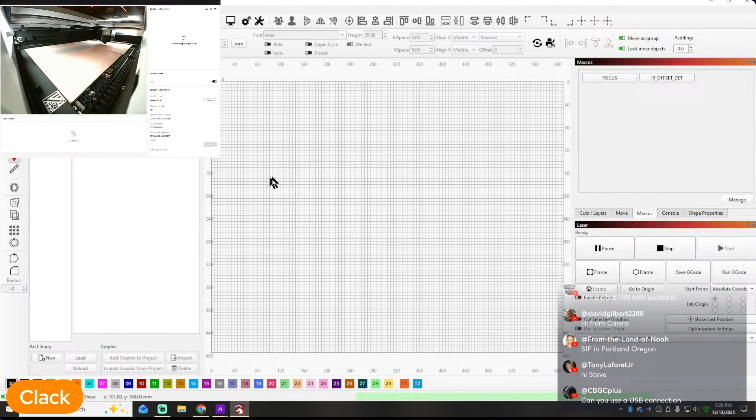So now I've got to switch back over to the machine, and you'll notice when you connect it in LightBurn - yeah, there it goes - you'll see this little green bar pop up down here and it'll say ready. To be honest, there's not a whole lot of other stuff other than this little bit of traffic between the machine and everything.

You can go in here and move it because the machine doesn't make a noise. It doesn't beep, it doesn't do anything when you connect it to LightBurn. So you more or less just have to know that when you see this green bar down here pop up, it's connected.

Now, you might ask, how do you go about setting the focus? Because this machine does have autofocus. The way it works in their software, it automatically does a probe before each job, but LightBurn doesn't seem to do that.

But what you can do is use the navigation button here to move the machine to wherever the material is. I'll move it close to the camera so you guys can see what happens - you can move it really close to the camera there. On that material, all I've got to do is hit this little macro button right here.

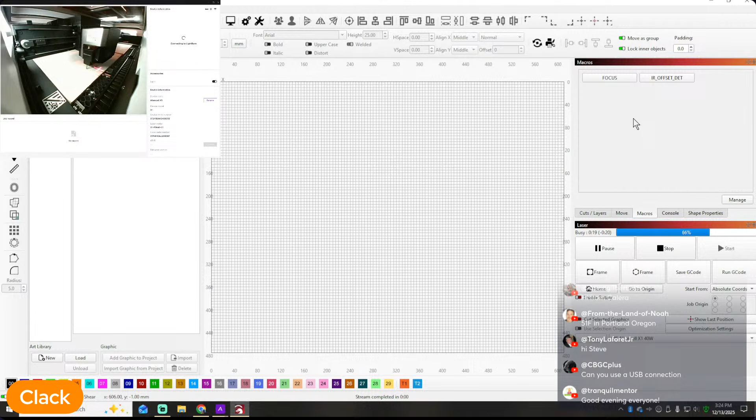It says focus. It's going to run to the back and set that probe foot. It's going to go back there and set it. Once it gets it set, it's going to come back out into the work area where I told it to set the focus - wherever I was at when I said set the focus, it's going to come back to there. It's going to probe down, it's going to touch off. Once it touches off, that gives it its measurements and everything, and it's going to go back and reset the little probe foot. Once it does that, it comes back to where you left it. The focus is set and it's ready to go.

The only thing I have noticed is this progress bar. They've said they're still working with LightBurn to polish everything up, but this doesn't seem to affect anything other than just annoy my OCD.

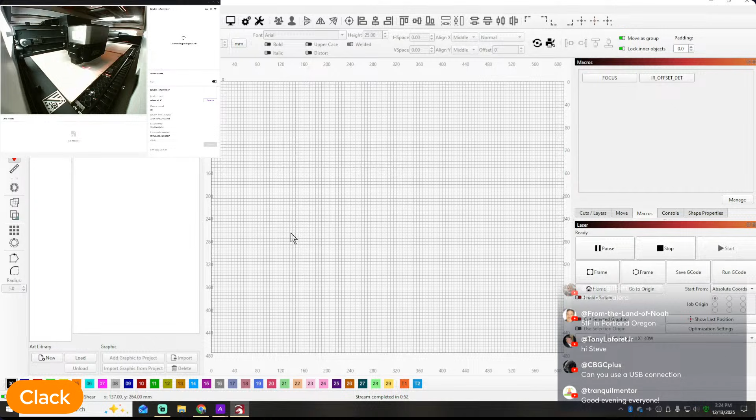Because I can still move the machine - well, I thought I could. But if you hit stop there, you can go back to doing what you want to do. I'm not real sure what that little progress bar thing is. That's probably some coding that needs to be tweaked in that stream from starting the stuff, because you see that little command that looks like it's in Chinese - I'm guessing that's what's causing it to hang up. But other than that, that's the only glitchy thing I've found that I can mention. So let me check the questions and see what we've got going on so far.

4 degrees with negative 15 wind chill. No, thank you.

CBG is asking who makes Aliencell. Aliencell is the company - I don't know if they have a parent company, but if you search for their stuff, it's going to be under Aliencell. The model of the machine is the X1 that I've got over here. They also make all the peripherals to go with the machine - they have a fume extractor, and they've even got a little handheld vacuum to clean up the crumbs with. I didn't notice that until today. I was looking through some of their materials, but they're going to have basically a whole ecosystem around this machine, so that's going to be pretty cool.

David Gilbert says hello from Calera. Hello, how are you, David?

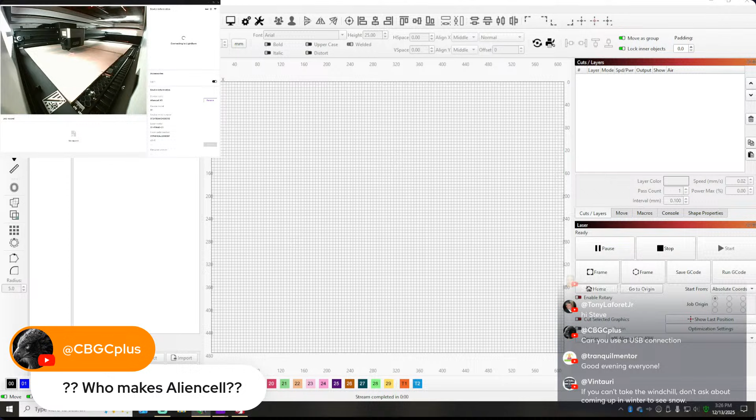Yes, CBG, you can use a USB connection if you choose. USB works fine. I like testing the Wi-Fi because most Lightburn operated machines will not work over Wi-Fi, so to me USB is a no-brainer - it's going to work, but it does kind of tether you to the machine. The fact that I can work this one through Wi-Fi and wireless, to me, is a pretty big deal. So that's why I want to test it, just to see how reliable it is and how well it works. So far I haven't had any issues.

I've got the Aliencell software connected right now. I don't have an active job going, but you have to open this window to be able to get to the live view, and I've got that live view pulled up and running.

With the live view, I'll show you this too while we're at it. I wonder if it'll let me - where's my mouse? My mouse is getting lost. All right, never mind, I was going to try to pull that screen back down here, but I can't. I guess because I've got that screen capture going, I can't see my mouse up there.

But with the live view, you can actually turn the lights off and on. You can do all kinds of stuff in there also.

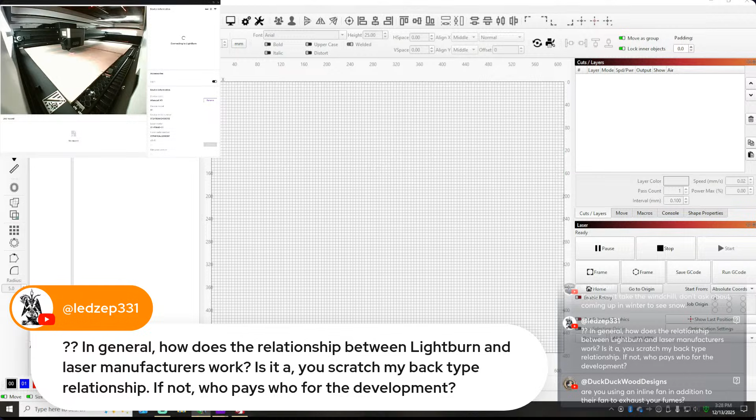Led Zepp's asking, in general, how does the relationship between Lightburn and laser manufacturers work - is it a you-scratch-my-back-I'll-scratch-yours type relationship? If not, who pays for the development? I'm not 100% sure on that. I know in order to adapt it, there has to be some commands and information exchange between the two. Lightburn does want their machines to be, from a business perspective, compatible with their software, especially if it's going to be a really good selling machine. But there does come a point where it's diminishing returns if it takes too long to develop it.

So far it seems that other than the camera right now, everything seems to work with it. The little camera up here in the corner of the screen is me recording from another tab, so that's not actually in Lightburn. But other than the overhead camera - because this one's got 2 cameras that are calibrated and stitched together - everything else seems to be working fine.

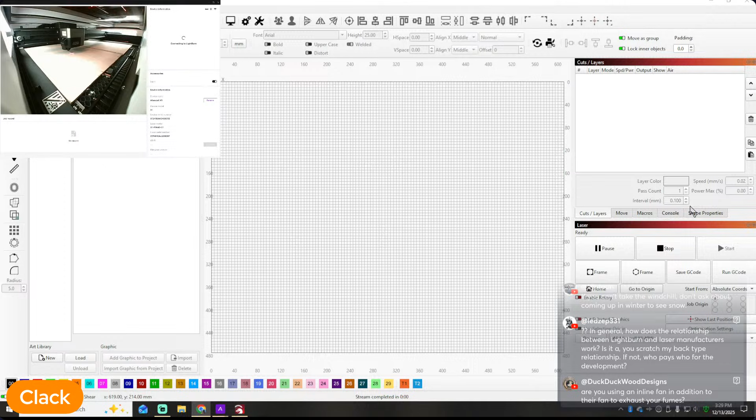With this little job I've got tonight, although their software isn't awful, and we'll touch on it before we leave in case you want to see it, I feel more comfortable designing files in Lightburn. So for this particular job, I decided to go with Lightburn. Let's go ahead and get this thing thrown together and we'll burn out a prototype real quick.

I just want to show you guys how it worked, and you'll get to see a real simple file be created. So what I'm going to do is import an image.

This is the image the lady sent me, and she said can you make me something similar to this? She's a friend of mine, so I was like yeah, that looks pretty simple. It does kind of mess with my OCD that whoever made this did the line work so messy. I asked her if that's intentional, but haven't heard back, so I'm not going to worry about it. We're just going to design it to look similar and go from there.

First off, I want to make a little circle here, and this one's kind of jagged, so there's going to be some editing I have to do, which I'm not a fan of. I'm going to have to convert this to a path so I can edit the nodes, and make this one a little wonky on purpose, which totally goes against all of my instincts. This is not natural for me.

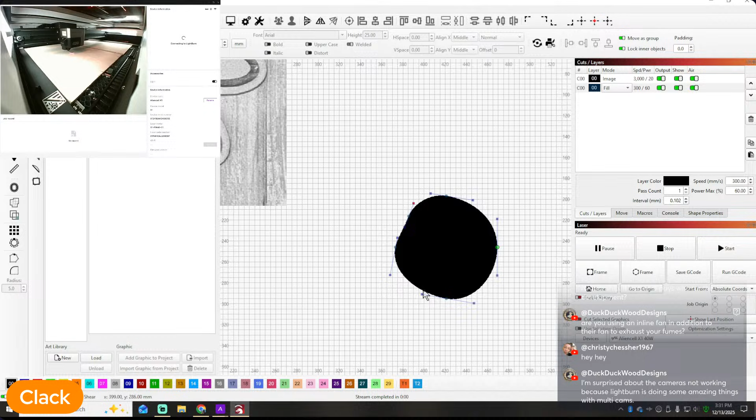I'm going to insert a couple of nodes around the corners here, making it wonky on purpose, which is odd, but it's the way she sent it to me. So I'll push back my OCD and just be task oriented, and we'll try to make this wonky. There we go, I think that's good enough.

So I'm going to change this over to a line and offset it. What do y'all think, 3 millimeters? Actually, since my design's kind of big, we'll go 4 millimeters maybe, because I can scale it. There we go, oh, somebody forgot to turn off the delete.

All right, so I'm going to group those together and change that to a fill now. So there's my little wonky shape that I'm going to put in the center.

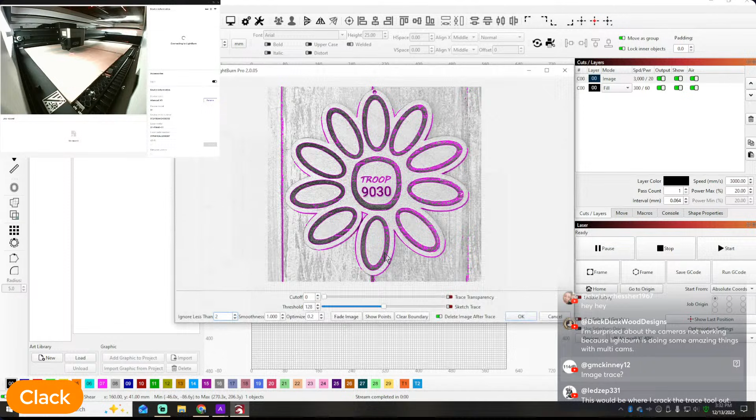I thought about tracing, but let me show you something. Stuff like this, if you try tracing, you get all these little issues, and to me that's annoying. Then you'd have double lines, not to mention somebody else made that. I'm not going to copy it completely, just use it for inspiration. So they got that one.

These are a little better. They don't mess with me as bad because I can literally just throw in a little shape right there, then do another offset right there. Boom, I'm done on that one. Fairly easy enough.

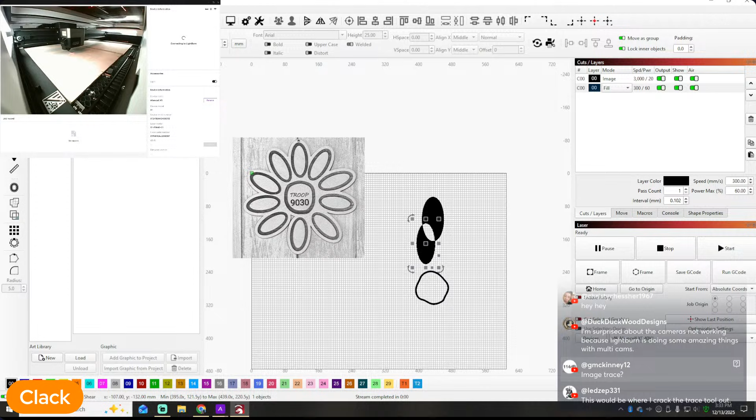Let me go ahead and group that. That should have done it, a Boolean. All right, so to get those around the edge, there's a couple ways you could do this. You could just do it manually, since this is kind of a messy design with gaps. To make this one look like that one, I've got to throw my OCD to the side for a moment, because that would have never been something I would have done.

So I'm hoping she wants it, not like that. I'm going to hold shift and make myself a circular shape here, change it to a tool line, and bring it down to kind of center it. See, this is why I hate odd shapes, because even though I center this, it's not going to look centered. And I hate that when they did that last update, I accidentally create these little boxes so much now.

All right, so the easy money on this one is just to click that one, hold control, click that one, and they moved my tool around. So bear with me, I'm having to learn where everything's been moved to now. There it is, copy along path. Because when they did those updates, they moved my stuff around. I got to rotate those.

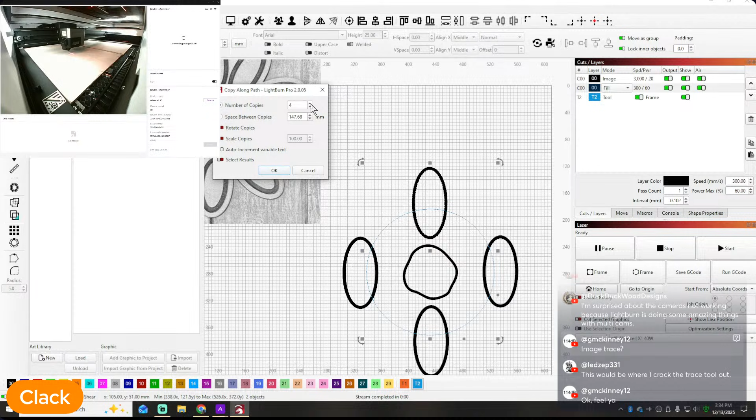All right, so now how many we got on that one? Let's see, 1, 2, 3, 4, 5, 6, 7, 8, 9, 10. So we'll do like 10. To me, that looks good. Let's count again, yes, 10. I put 10.

That looks pretty awesome, if you ask me, right there. Now I don't have this little janky thing going on here, but we're gonna hope that she didn't need that, because that's not a requirement. That's really gonna mess with me if I do.

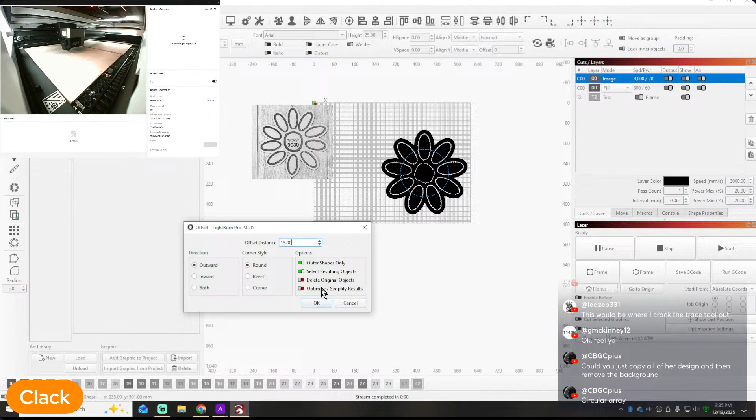So now get this out of the way. All I gotta do is offset right here. This is gonna give me a cut line basically. I'm gonna bring that cut line out just a little till they touch about right there. Now that needs to be changed over to cut. So there we are.

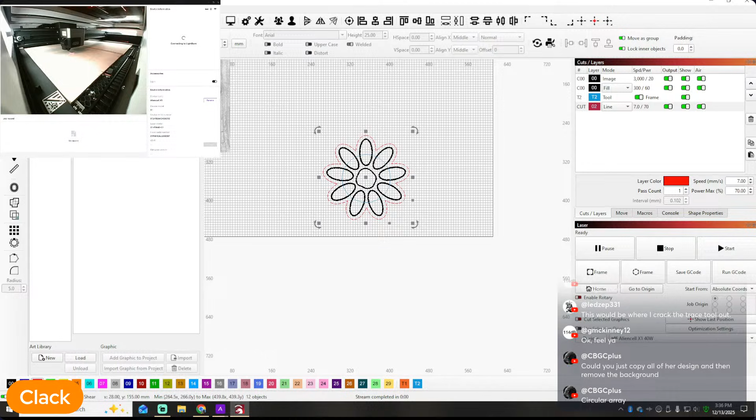Let's resize this. She said the size of an ornament. So what are we now? 100 by 100. Let me see how big that's going to look. About 100 by 100, yeah, that's about right. That's about ornament sized.

Now, I do like she's wanting this to be an ornament. They put like a little hole right there for their design. I guess I could do it that way. If I can get a 3mm hole to fit there, I'll be all right. 3mm is plenty for a piece of wire or string or something. Yeah, that'll fit.

So we hold Control, we'll select this outer shape. I'm just going to align these guys. So yeah, there we are.

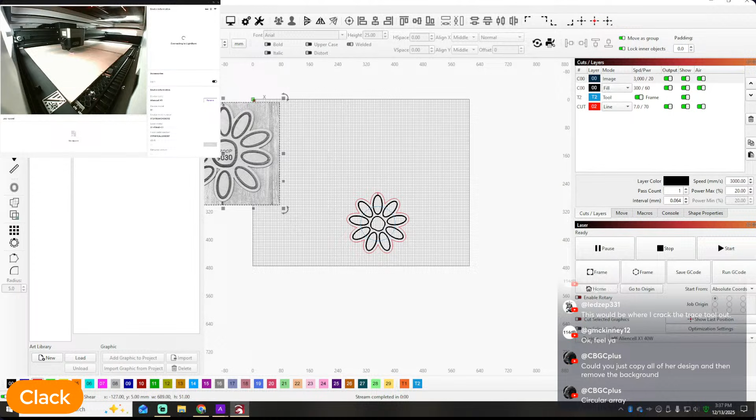That part is done. Now for some text, and I'm hoping that the text is right. But oops, see that's why I wish it would automatically default back. There's probably a button I need to engage to have it automatically default back.

So now I got to put some troop text in there with this 9030. I'm guessing they added that. That kind of looks like they added that to it because she sent me that and said, 'Could you make this like for me?'

Troop, and then 9030. Oh, somebody's holding down shift there. So we're going to change that first of all to there, and then the text.

Let's see what we got here. Need something kind of cool, kind of cute, not too cute. Let's see. Yeah, I think that's going to be it.

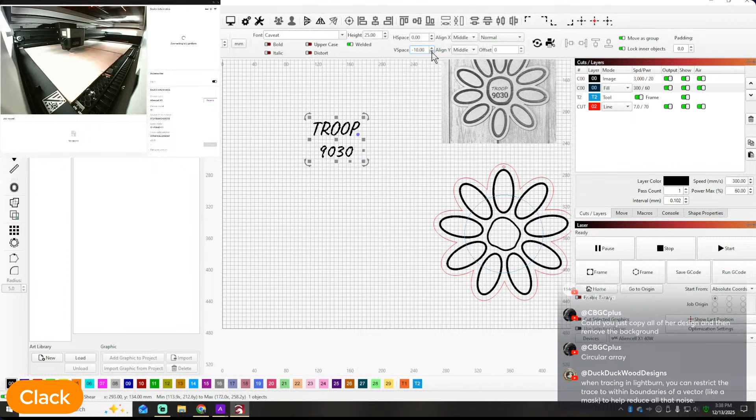All right, let's see here. I'm going to shrink that down awful small. Put it about, let's see, I can use that odd shape to my benefit. Let's try to center it, see what it looks like.

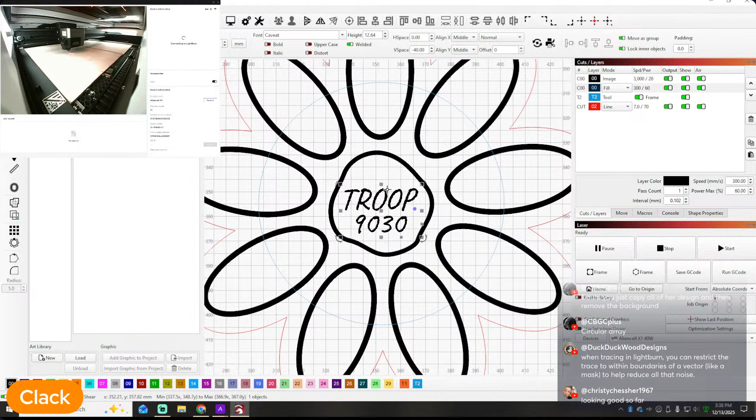It's a little close to the edge, so I'm going to bring that down just a couple of millimeters. There we go. It's technically centered left to right, but up and down I moved it down to take advantage of that wide spot. So there we go.

I think that works. And see, I can actually take and hide my little tool line now. I'll leave it in there in case I ever need it, but you can turn that off so it's not visible. And then that's got this. So yeah, there we go.

So I can delete my inspiration now. And I think I had this set at 100. That's what I decided on. So that should make that about that big.

So we'll group all those together so that we can replicate them if I need to. I'm just going to do a prototype for now. I do have a bunch of material in this machine.

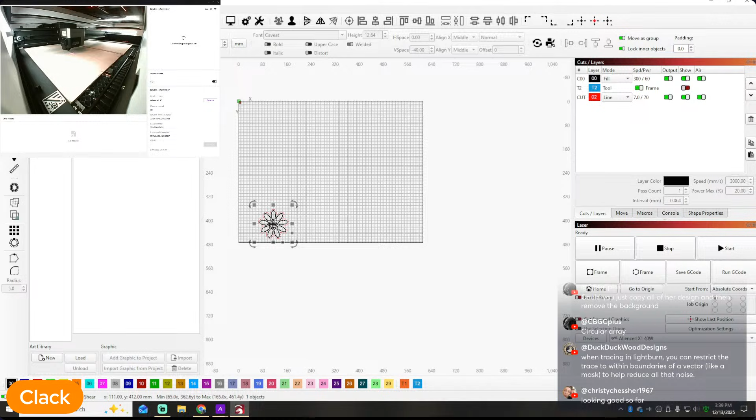So just so y'all guys can see it, I'm going to put engrave like right here because I've got the whole workspace covered. And coincidentally, the workspace of this machine will hold 2 of my small squares that I cut when I break down my material. So I've got that there.

30 and 60. Have I created a material library yet for this? I don't think I have. Where is my material library? I don't think I have. No, I have not.

Let's see, 30, 300 at 60, 250 millimeter. Let's see, this is wood, so we don't need that. Turn it down to 127. 60% at 300. Yeah, we'll do 100.

Oh, that's one thing too, the air assist. I don't know that I'm going to have varying air assist. It may be wide open, so I don't know how that's going to work out. But I am going to run the air assist just so I don't have to worry about the nozzle getting dirty.

This material's been cutting really well at 10. So I'm going to run it at 10, assuming that it unleashes it completely with my software here using Lightburn. We'll sort cuts last.

Yeah, I think we're good there. Now we'll frame it and see if I can see it up in the little window up there. So we'll frame it up. Oh, what'd that pop up and say over there? Hang on, I can't see that top window.

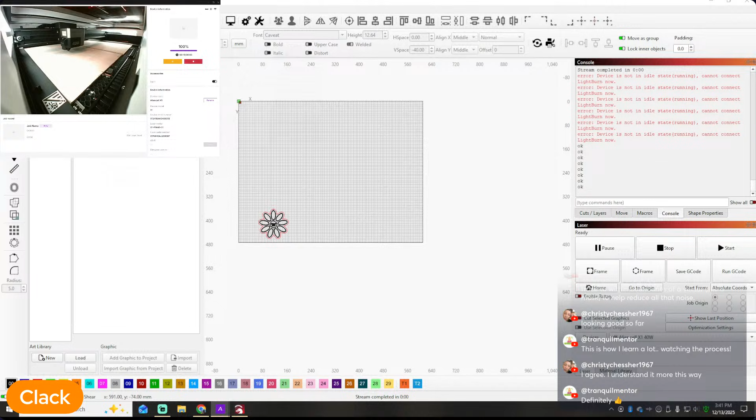Okay. So, is it because I got the window open? Or wait a minute, now it's doing something. What are we doing?

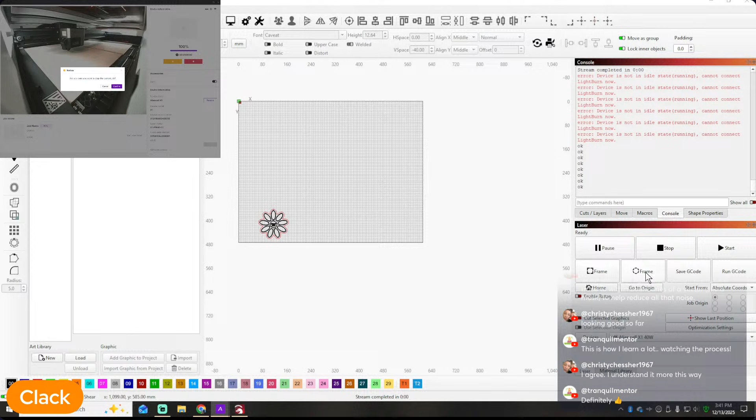We just rehoming? All right, so let me try the other frame. Uh-oh. Lightburn has exited.

Not sure what we got going on here, so we may have a glitch. That's no good. Oh, wrong screen. Give me just a second here. Let me get all my screens fixed. I messed all my screens up trying to see everything. All right, got that one up there.

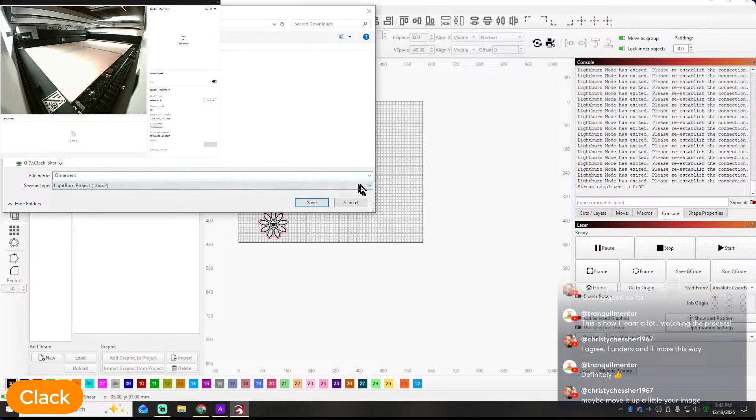Lightburn. Okay, now. All right, so let me disconnect from the machine here and see if I can. Well, first of all, let me save this file. I'm just gonna save it in my downloads real quick. I'll save it there just in case, so that nothing happens with it. So I'm gonna close Lightburn out and open it back up and see what happens.

I don't know what happened there. It did not like the frame. So we'll go back to the Aliencell. Lightburn is not in an idle state.

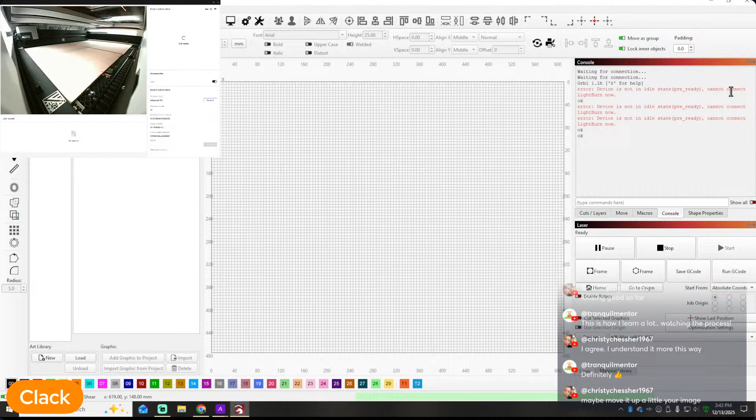Cannot connect. Yeah, I think I'm going to have to close my Aliencell software, guys. Let me close that out. Okay, it beeped on me now. So yeah, I think that was the problem. So let's file,

recent project. All right, so I don't know that I'm gonna be able to use that other camera. So let me get my webcam out here. Let's see if I can see that one there.

Is it looking the right direction? Yeah, it's looking the right direction. Okay, so now let me see if I can. Now that I've got their software cut off, let me see if it works better now.

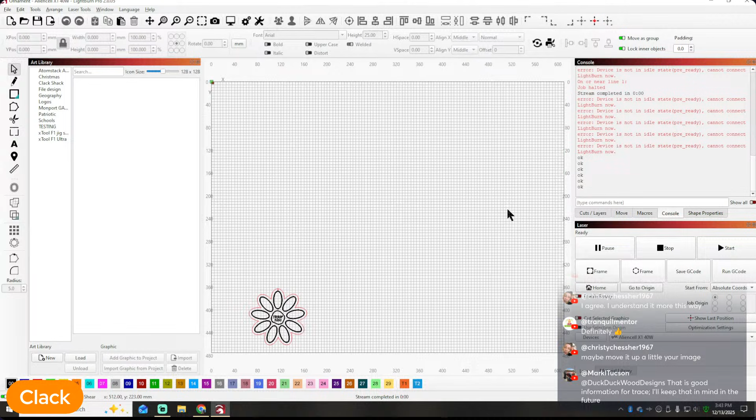No. Still not wanting the frame. Well, that is unfortunate. What have we got going on today? Absolute coordinates. Let me power the machine off and back on. Maybe I gotta cause an error with all my software.

Well, at least I can go back and watch this video if it's a problem. It's saying, let me get you over here where you can see it. It's saying its device is not in an idle state. So I'm not sure what all that's about.

I am, however, just in case, going to go ahead and export this file here. So let's do that. So I'm going to right-click all of that file, export. I'm going to export it as a SVG. Worst case, I'm going to go over there and cut it with their software.

All right, not in an idle state. Let me see if I can hit home here. All right, what's it doing? Oh, I can't see it going that direction. All right, it did something.

So maybe if I just send it. I'm going to try to frame it one more time. If it does it, I'm going to send it and see what happens. So let me see if I can frame it again. I'm going to use rubber band frame this time.

It beeped. It says okay. But it didn't do nothing. All right, let's try another frame. It says okay, but it ain't doing nothing. All right, we're just going to send it.

Nope, I done hung it up. Hang on, let me go look at that. Let me go look at the front of the machine at the little controller.

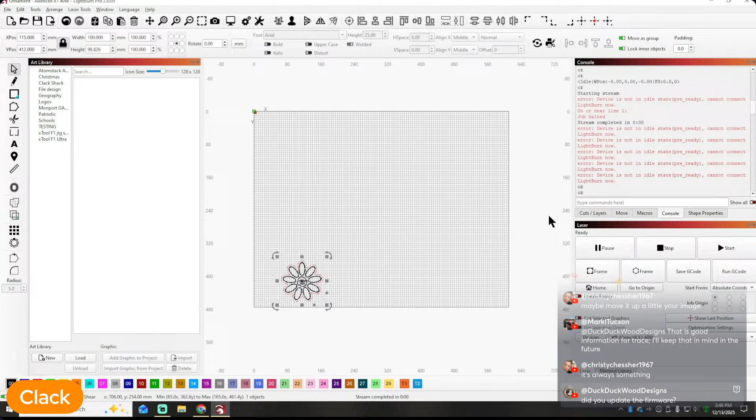All right, well, I'm just gonna send it because I think that's where, because I haven't had this problem, so I'm thinking that I've just been sending it and not framing. See this, guys. This is the joy of testing new stuff.

All right, so I think it did its little homing thing it's supposed to do. Hang on. Yeah, you can see that. You can see the crosshair up there. So it did its little homing thing it's supposed to do. I'm going to move it out into the work area.

All right, I'm going to set the focus, which is going to run over to the corner. It's going to set the little probe. Then it's going to come back. Then it's going to probe. Then it's going to go back, reset the probe.

All right, so we're going to forego any kind of framing. We're just going to make some smoke because, all right.

So got that done. Had to hit stop because it hangs up after you do the probing for some reason. I'm just going to send it and see what happens.

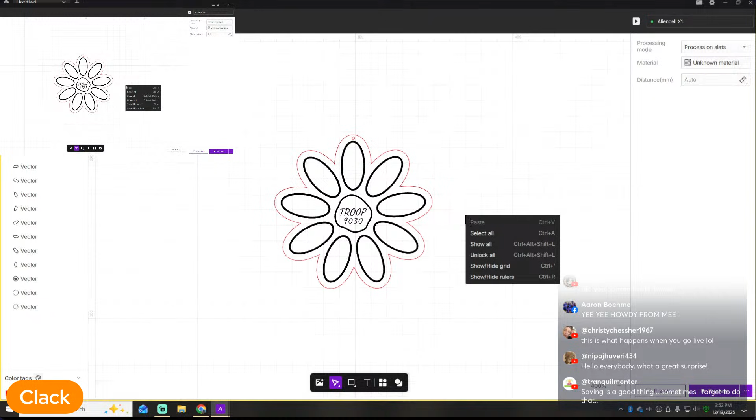Yeah, I think, oh, we back up to where I can see. I did tell them that this button right here for the capture needs to be here, because where it's at right now, if you zoom in, that button disappears. So like if I zoom in right now, my screen capture button is gone. So they need to take that and put that button like right here.

So there's my material. So I'm going to grab that and I'm going to pull it down here out of the way. I'll put it not too close to the edge, not right there, that way you guys can see it.

The only thing that I'm not 100% sure is, does it start at the bottom or does it start at the top when it does the engrave? So we'll see which one it does first here.

What window is that? Why have I got a window and a window? Hang on just a second, guys, let me see what this is. What's going on with that? We'll change that, all right, I'll just get rid of that.

So that should be it. Let's do framing this way. Let me put my other camera on. So I'm going to frame it with their software now.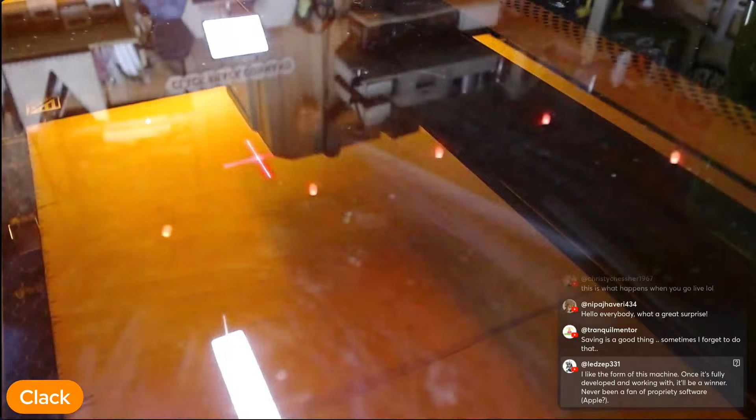All right, so yeah, worked out really nice. And the cool thing about it is like right now, so I need to put this on honeycomb first of all.

The focus is set to auto, so when I send this job over to the machine, it's going to focus before it runs the job. If you look on the screen, this is part of the reason why I like using their software with this machine. That little red X you see right there in the software is that X right there. That's where that crosshair is pointing on the laser, right here in the software. So that's why I say, if you get this machine, try to use their software. It seems to be working pretty well.

But if you're just dead set on Lightburn, like I said, they're still working with Lightburn folks to get it implemented, but you never know what level of implementation there's going to be. So we'll go from there. But anyway, I'm going to hit the process button.

And now I've got to go hit the button on the machine. I'm going to move you guys over to the camera right there, see if I can get a better view. So I hit the button on the machine, and it does a little left-right system test.

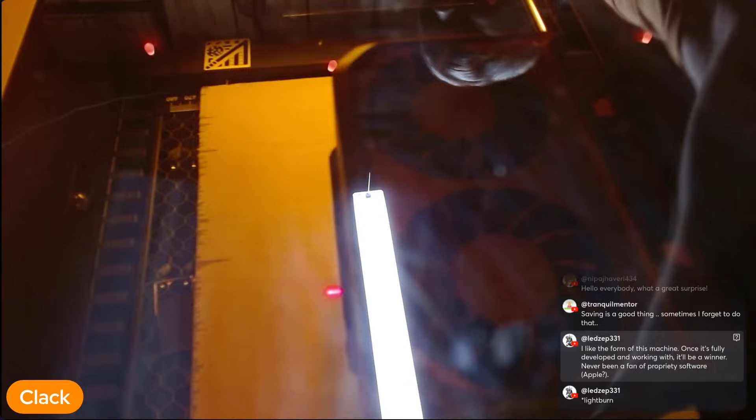And now it's going to set the focus because that light's right in the way. So now it's just going to sit there and do its little rocking.

I will pull up the other camera so you guys can see that. This is what I think is pretty cool about it too. There's your camera, and it tells you an estimation of how long the job's going to last.

And you can turn, like if I wanted to turn the lights out, you can turn the lights out in the machine, turn them on. The only thing I haven't done yet is figured out how exactly. I know it's got to be doing it over IP, like it's got to have that camera set up as a camera over an IP address. If I can figure out what port to set, I could technically set that thing up as a webcam, a camera over IP address. But I haven't played with it that much.

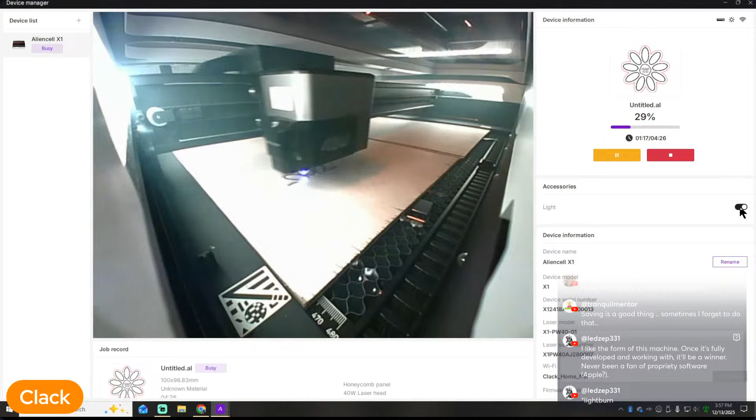But the machine's doing a pretty good job so far. Way too much traffic in and out of my driveway this afternoon.

But anybody got any more questions?

Yeah, Led is saying that I like the form of this machine. Once it's fully developed and working with, it'll be a winner. Never a fan of proprietary software.

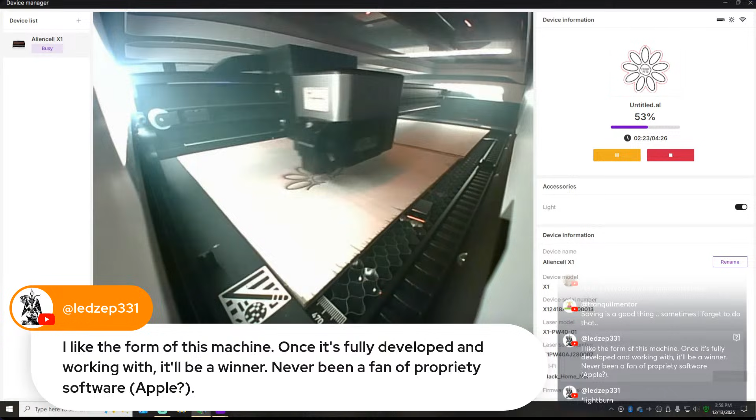Yeah, well, I agree, but you really can't count on what Lightburn is willing to do for this machine unless they get paid. They may say, hey, we'll make Lightburn work with it for X amount of dollars. I don't know how that works on the back end, but I do know that from Lightburn's perspective, unless the machine is a really hot seller, I don't know that they're going to attempt it.

And if they do, I need to turn my other fan on too, because I've got 20 foot of run on the hose. So the fan that's in the machine does a good job until my hose gets filled with smoke, and then that's it. So I have to turn my assist fan on, and that's just because of the way I've got my exhaust set up for my testing equipment. Because none of this is permanent, so I just use a really long hose and an assist fan right at the wall that pulls it out and blows it out the wall.

But yeah, hopefully Lightburn will do more work with this machine and get it more compatible. Like I said, it was working. I don't know if it was a firmware update or a Lightburn update that got me, but the other day I did a power test with it. So I'm not sure what's going on, but I kind of expect it to be a little rough with Lightburn for a little while until they get all the bugs worked out of it.

But like I said, I can always design, export, and bring it over. You saw how easy it was to assign the power settings if you exported as a layered out SVG.

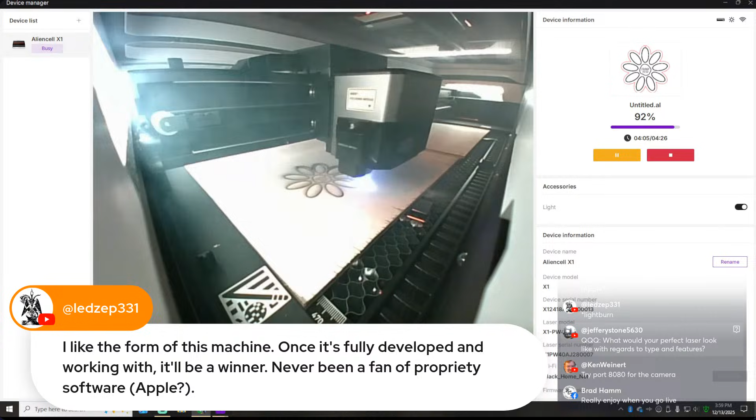Okay, the air assist sounds like it kicked up pretty good. But yeah, that thing's throwing some smoke now. But yeah, it's been doing a pretty good job. I don't know what I got my air assist set to on that layer. I didn't think about that because it does not sound like my air assist is wide open.

The cool thing with this machine is too, you can set varying levels of air assist on the layer. So if you've got a material that doesn't do well with a lot of air, or if it doesn't do well with a little bit of air, you can change that and make it more specific. So let me go look at that and see if that cut through all the way and everything.

Not quite. Gonna have to slow that down just a bit. All right, so

But I'm going to check, I do need to check my air assist. So with this, where's my advanced? Oh, there it is. Air assist was at 10%. So yeah, I'm going to take the air assist and run it up to 100% because I need it to be really good.

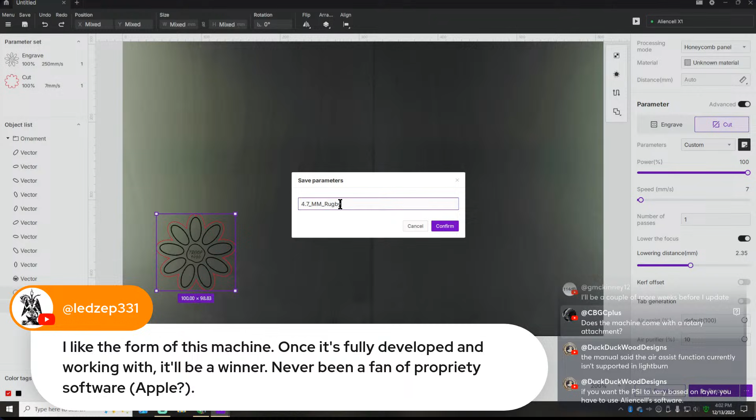So now that material is in, well, actually, did I have it? Oh no, that's where I just put it in there. Isn't it? Yeah, that's the same one. So now that material is in there, next time when I go to change it, I can just select that material.

So now I have it set to 7 millimeters a second. I'm going to update the picture, and this is where I wish that button was up here so I didn't have to scroll around looking for it. So I'm going to update the photo. There are occasions where I hit the update button and have to hit it twice.

I don't know if it's a regular thing. Yeah, see there? I don't see that image. So hit it again, it should show up this time. For some reason, the capture button, the past couple of days, I've been having to hit it twice to get it to go through. Yeah, there it is. So I don't know what's causing that.

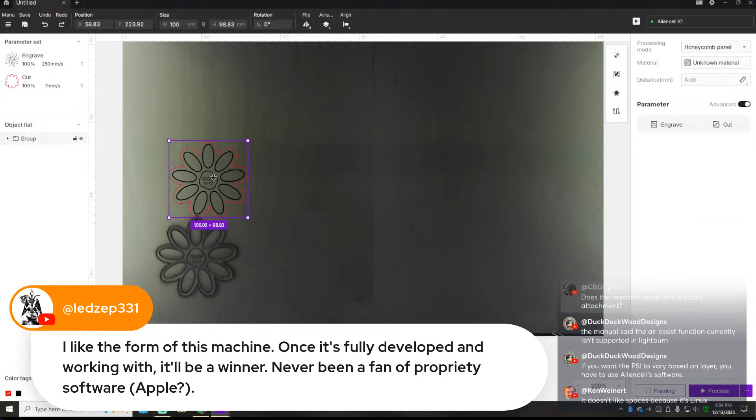Oh, it's not grouped, so I'm going to group this together. And then we'll just do this one right above that one. Process. And I got to push the button.

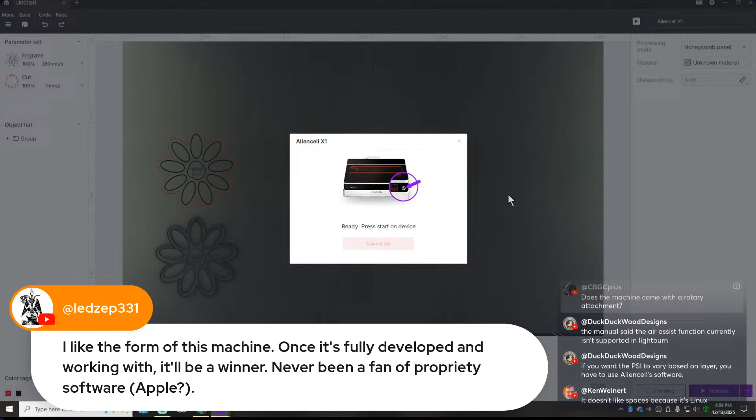All right, so I'll open up the little camera here so you guys can see it again. It's going to go through the whole ritual again because I put it on auto, so it's going to set the focus before it does the cut. The cool thing about it is it's kind of foolproof on that, because even though I forgot to set the focus, it's going to set the focus automatically. And now it's going to go in here and do our engraving.

And once it finishes the engrave, see, it's only on like 10% on the air assist for the engrave. You can tell it by the sound of it, it kind of sounds like a boat motor or something running. Like it is not a quiet air assist pump, I'll tell you guys that.

But when the air assist is running, I don't know if you can hear it in the background, but it's kind of like a little boat motor or something. But I did change the air assist to 100% for the cut, so we'll see what that is.

DuckDuckWoodDesigns, it came on. The air assist came on, or was coming on, but there's still a lot of work to do with the lightburn setup. I had it doing more stuff the other day, I'm pretty sure, but it may just be because I started a live video and it decided it didn't want to do it.

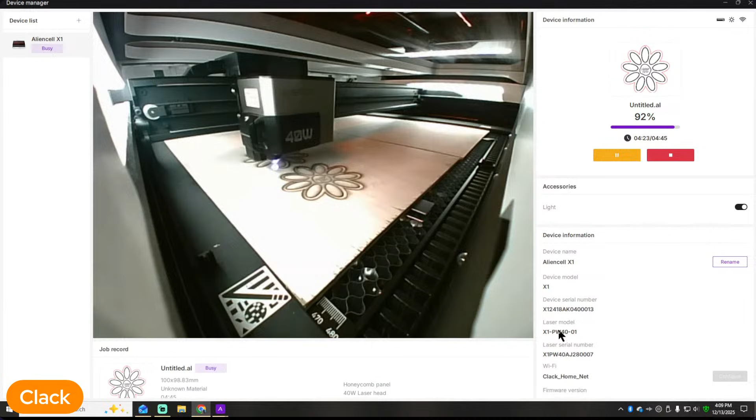Like down in here, you can actually see that I'm connected to the Wi-Fi network. And it's got a lot of the information about the machine, which isn't something that's critical for me to see when I'm working on the job. But it is there, and like I said, you can turn the lights off and turn the light on. It's kind of neat, I like being able to view this camera.

Oh, that seems to be cutting it out. It looks like it's... see if I can see it drop. Yep, there we go.

So the one thing I will tell you with this machine, if you get one, when it quits running, just because it's quit running, give it a second before you open the lid until it says task completed on the screen. Because it does have a period of time where the fan runs and everything to kind of purge all of the smoke out of the enclosure. So you want to let that get done first.

So the fan on the machine is still running. I don't know if you can hear it or not. But the fan, the main exhaust fans will cut off, but it takes them a little while. There they go, it finally cut off just now.

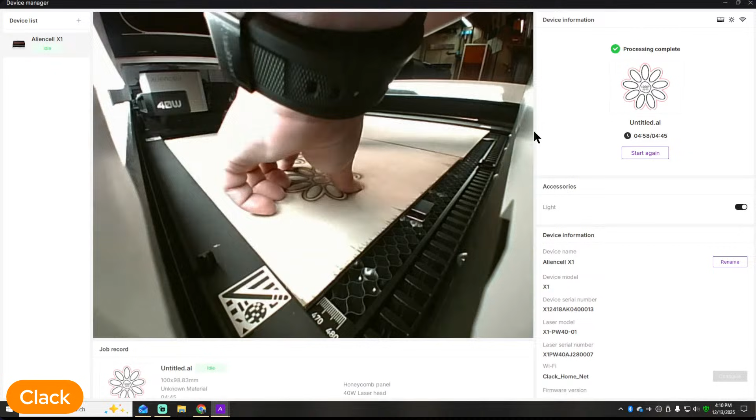So there we are, straight off of the machine with no touching. And you can try to brush it a little bit. Yeah, brush ain't gonna cut it, that's gonna need a little bit of sandpaper. But there's the design, it's cut out.

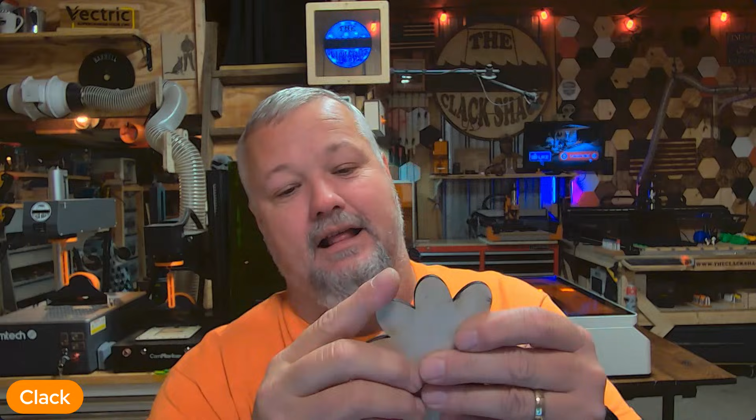All together, let's see, I gotta make sure my hand's clean. All right, hand's pretty clean. All together, it does a good job. I'm gonna run my finger around the whole outside perimeter of it. It does a good job of staying relatively clean on the cut. So it's not bad. Let me go over here and hit this with the sander for just a second.

Okay, I forgot about that being loud. I hope the noise filter caught it.

All right, somebody needs to change the sandpaper out on the sander. It's in bad shape. Apparently I was doing something with sharp edges last, but there's the design.

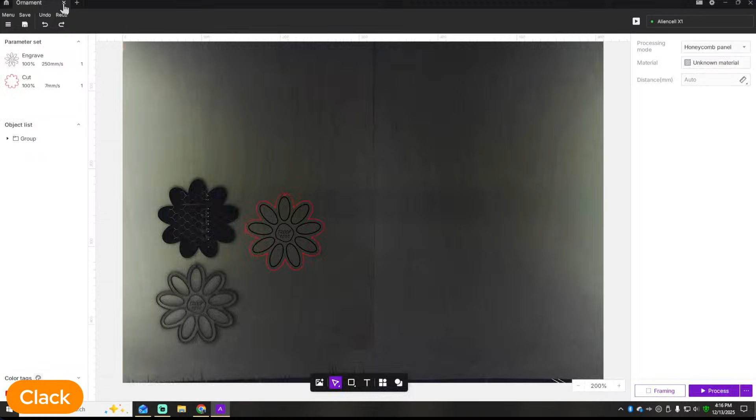Now, since we are doing this as a job, I am going to save this. And I haven't quite figured out, you save it, but you have to save it to, like, I'm going to save it to my downloads for right now. I'll save it in her folder here in a little bit, but I'll reopen it here in a little bit and save it where I want it. But there we go, and so now when I close this, now I have the ornament and my bamboo cutting board jig that I built. So it's pretty decent, like I said it is not without bugs obviously, but it's pretty decent.

I'm going to close all of this. All right, and let me find a USB cable that'll reach it, and I'm going to see if there's a difference in Lightburn with USB. I swear I did not have these issues the other day. And this is my really long USB cable.

And just to make sure, I'm going straight to the computer, and I'm not going to go through a hub. That way, you don't have to worry about it.

So, back down to the bottom screen. Now what I'm going to do is go into my devices here. I don't want to delete that one because that way I can test it later. So what I'm going to do now is export that one to my downloads.

And then I'm going to import it back in here. But the one that I import, I'm going to change the way that it works. I'm going to change it over to a USB version and rename it. So I'm going to edit GRBL, change this one to USB. Next. And I'm going to name this one 40 watt, but I'm going to name it USB.

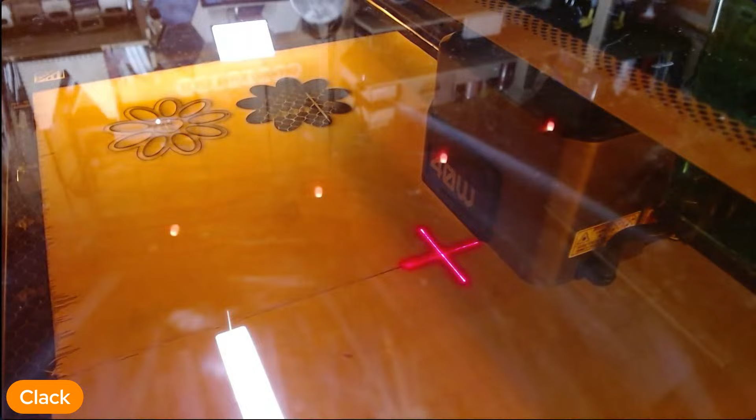All right, so I'm going to go to the Move tab. Let's see, right step, all right. Left step. Up. Down, all right, Z-axis down. All right. Home.

All right, so I'm going to draw just like a little square or rectangle down here in the bottom, set it as a cut. So now let's try sending a frame using USB, see what happens. Okay, that's why I used it the other day in

Lightburn, I knew I did. Okay, so let's see, I got that set to 10 millimeters a second, 100% power. So let me change that to 8. So apparently the wireless is needing some work. All right, macro focus.

What makes me feel better, because I knew darn well, I was like, man, I have been running this thing for... I knew I'd run it for 2 or 3 days just in Lightburn. And I'm like, why is it not working now? But I guess I swapped it. Okay.

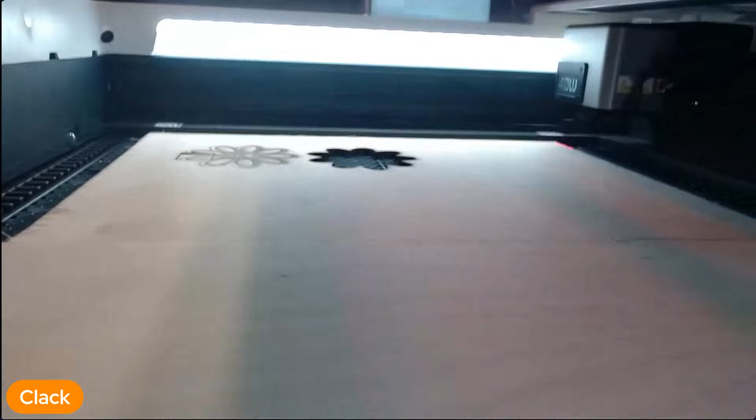And that's just a rectangle. As long as this works out, no problems, we'll go ahead and finish what we started with the file that I designed. And just remember, guys, even though apparently it will work somewhat through Wi-Fi, it does not like it with Lightburn. Yeah, that cut, I see it - that cut out really good.

All right, so I set my little Logitech camera over in there. So here we go, I'm going to open up that file again. So, file, open - this is the ornament that we designed.

So no, I'm just going to bring it into here. So let's get away from all that. I think right there should be good. So let me navigate over there, see what that looks like.

Okay, let me frame there, see what happens. Oh yeah, so I'm on the material, all that good stuff. Do I got to focus again? I'm going to do it just to be sure, because I did open a new job. So I'm going to hit the focus button again.

I am glad it's working better, because that was like blowing my mind, because I was like, I know darn well I used it. Okay, what are we doing now? Why are we? My focus, did it focus? Did I miss it?

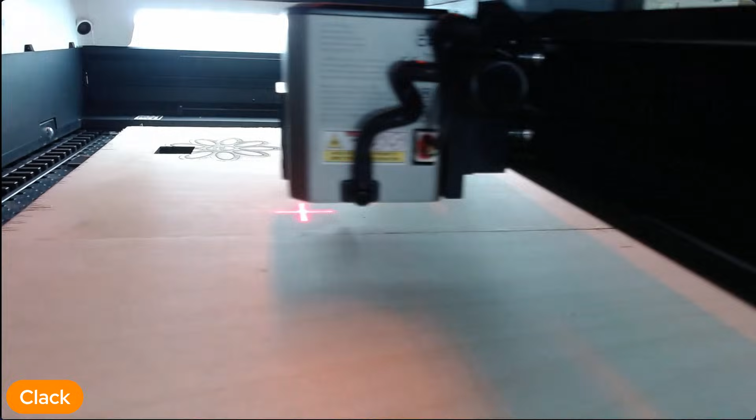You know what, it could have been when I first powered up. I need to delete that other Wi-Fi one, I think, because when I first powered Lightburn up, my frame could have tried to connect to the wireless one. So I think I need to delete that one before we continue, since I know it's not going to work. I'm going to save that one, hit the start button here, save that profile, but delete it from my machine so that eliminates that possibility, because it could be that the machine briefly was trying to connect that method. So you never know, you never know what it is.

But this does work much better than the Wi-Fi, so we're going to do away with that other one once this finishes. I just want to see this thing cut it out using Lightburn. That was the purpose of this video when we started. That blue light's a little excessive. That was the purpose of this video when we started, and we're gonna do that.

So yeah, I hope this answers questions for you. Like I said, guys, anytime a machine is being built not specifically to work with Lightburn, you're going to have a few little places where there's going to be some work needed to make everything work together.

Now, I do think there's a benefit to their software as far as some of the utilities and the tools and the way that it works. I like that. But in a perfect world, I want a machine that I can use their software, or I can use Lightburn and do all the same stuff. That would be really awesome.

With the remote camera, not using their software and being able to see that remote camera, I think that's not something that's going to work in Lightburn. But I'm kind of curious if Aliencell couldn't take and create like a small application that you could put on your computer to where it's kind of like a webcam viewer, so that you could actually open that and just be viewing it without having to open their operating software.

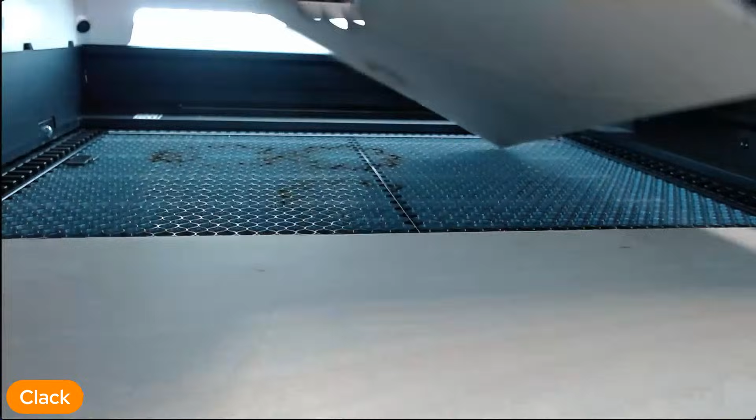What the heck? We didn't change that speed, did we? No.

All right, so to make this easy, since you don't have a camera, the easiest way to make sure you don't put it on top of the other one if your material's back in the same spot is duplicate that one, drag it over, get it about where you want it, and roll it.

Well, there's a line in the material right there. I think I need it to go right there. Let's delete this first one now. Let me frame that one, see if it's going to miss it. Oh no, I'm going to have to move that up and to the right a little bit. Frame it again. Okay, that's got me some space.

I don't think I'm going to have to set the focus again. Hopefully I don't, I've got it set at 7 millimeters a second. All right, so let's send it, see what happens.

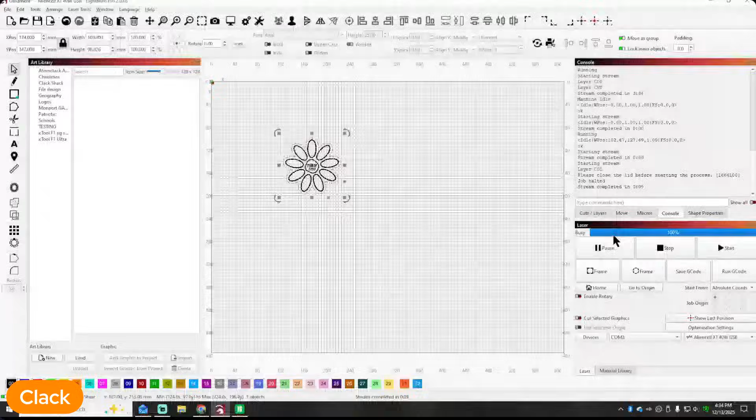Well, maybe it's not wanting to work with me here. Yeah, something's going on again. Oh, this is frustrating.

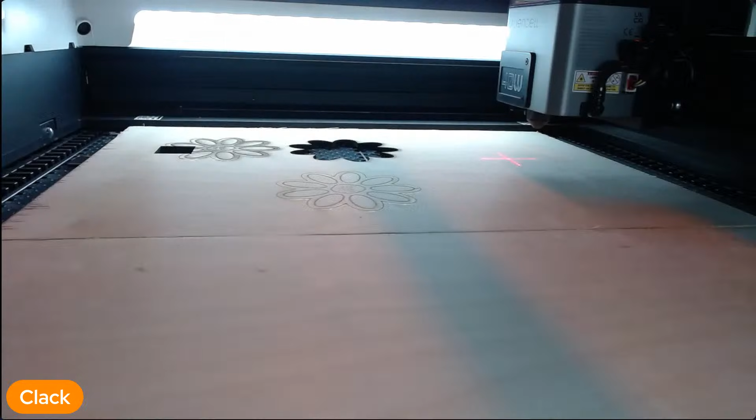Yeah, Lightburn is going to take some work, guys. It's still got a little ways to go before Lightburn is going to get my green thumb of approval with this machine. It works somewhat, it's just got some bugs in it.

All right, so we got it, it says it's connected. The module did move, so I'm gonna frame again. That's not wanting to frame. What in the holy mess is this? All right, so I'm gonna close Lightburn, open it back up. We're fixing that, we're fixing to just—

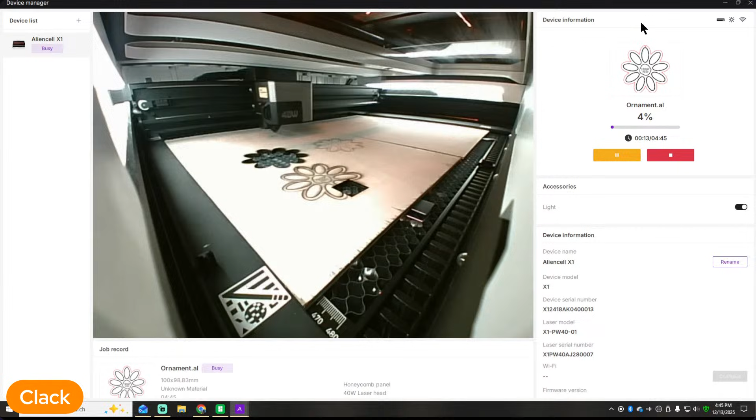Yeah, I had the camera sitting over in there, and I had the cable just run across under the lid and had to shut the lid on it. It was working fine in Lightburn, but their software is a little more particular, I guess. Or maybe Lightburn actually doesn't detect the door switches. But yeah, it would not let it run. It kept saying the door wasn't shut, but it was shut on a USB cable.

So the moral of the story that we've learned today, guys, is Lightburn looks promising, but there's still some work that needs to be done. And I'm not knocking these guys because, I mean, technically it's not their software.

That's up to Lightburn to affect the changes that need to be made, and whether they pay them to do it, that's something they're going to have to work together on. Michael's asking if they're going to make a riser base - yeah, they're saying they are. That's part of what they told me in an email, that they were going to address the limited Z-axis movement with a riser, which would be cool. Right now you can take the honeycomb, the blade bed, the chrome tray out of it and get maybe close to 3 inches if you lay it on the table beneath the machine. But I'm not 100% sure how that would work, and I don't know if it would run with the chrome tray out. I haven't tested that yet.

It obviously won't run without the door shut, or a USB cable run through the door.

Yeah, so far, like I said, I like the machine. The software is different - if you're a diehard Lightburn or go home type guy, it's probably not going to be anytime soon that's going to be 100%. Now, like I said, as far as them working on things, they are working on it really aggressively. So we'll see.

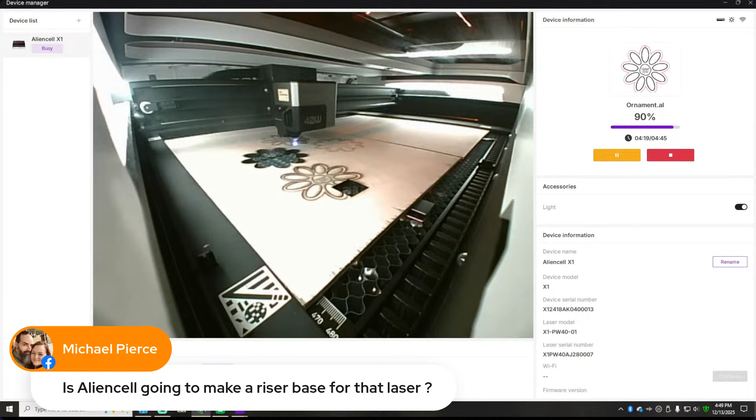We'll go see what that air assist is set up to. That thing sounds like a boat motor or a turkey. But I will hand it to them, the air assist pumps out some pretty good volume.

It's about time to do a cleaning video on it, I think. I've been running it a good bit and it's been staying pretty clean, but the nozzle and the inside of the machine are getting kind of dusty.

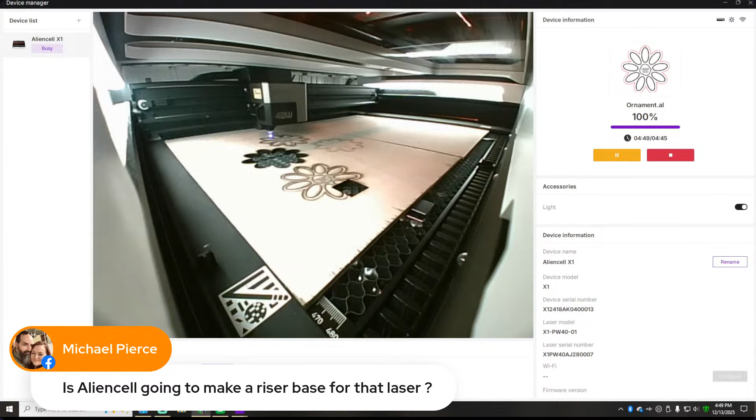It takes the machine a few seconds before it actually - see there, it just says processing complete on the screen. Now you can open the door. If you open it too early, it'll holler at you.

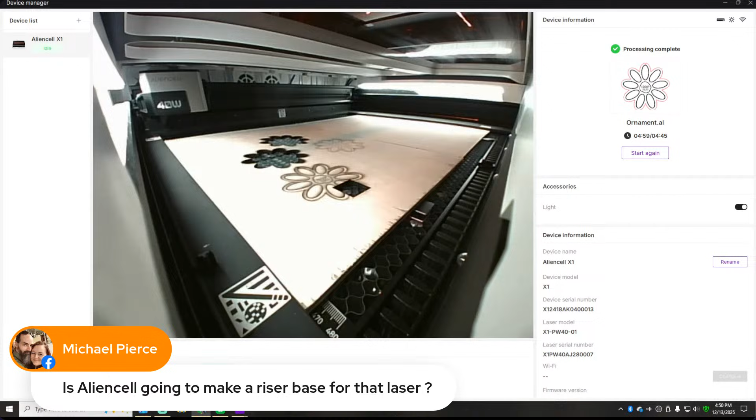Yeah, that one turned out pretty decent. Like I said, it's the same design - I didn't change anything, so we're not going to go through the trouble of sanding it and all that.

All right, so now we want to close everything out. I've got the camera, I don't need to save that. Let me get this comment out of the way. The camera is not under the door, so you don't have to worry about that. I do have the camera set up on the machine, so you can kind of see the back of my head at least - you can kind of see what's going on over there. So I'm going to go over to Aliencell.

It's showing the green bar - console shows that it's communicating with it. I'll go over here and see if I can move it, move the laser out into the work area. Okay, so far that works.

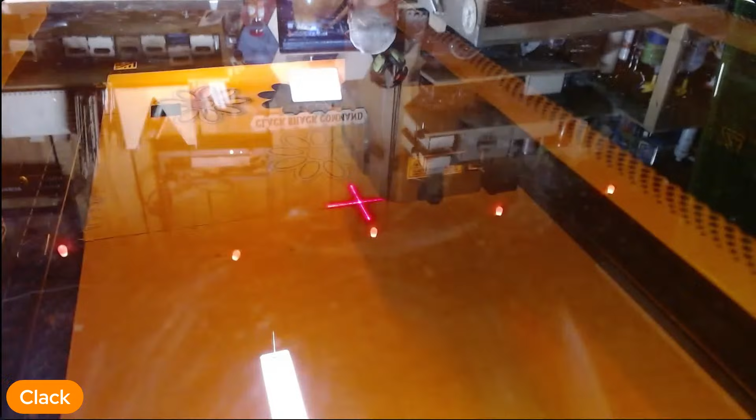So now I'm going to open that ornament design again. Let's make sure - did I save it a while ago? Yeah, all right. So I know that I've got a bunch of holes in this material, let me see if I got a spot I can put it. Yeah, up near the top, I could probably put it right about there. Let's see what that looks like. Ooh, I don't know if y'all will be able to see it or not. So I'm going to hit frame - whew, that's fast.

Hang on, I got to look at it again. It's right there on that line. So I'm going to move it left like 2 or 3 millimeters, frame it again. All right, so far so good. Console macros - all right, so now I got to set the focus. Let me get that camera where you can see it better.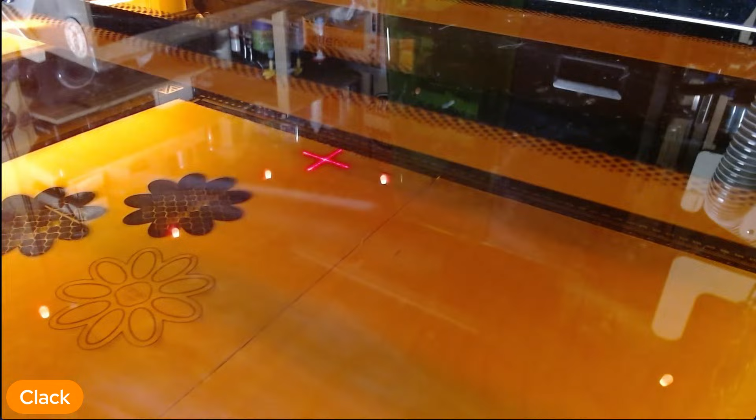All right, so let's see if we can set the focus now. I hit the button, it's going over, doing the probe. It's got to come back, it's got to touch down. Go back, reset the probe, come back in the work area. If this is it, that's going to... all right, so my settings are right. All right, here we go. I'm going to hit the start button, and let's see what happens.

Well, I'll be... guys, it could have been that USB cable. But you would think it would have thrown an error in LightBurn saying that door not closed.

Huh, maybe they should fix it to where it would make a noise on the machine or throw back an error. Y'all saw the console, it didn't have an error over there about the door being open or anything. So maybe that's all it is. Maybe they need to add it to where if the door is open, like with a lot of machines, if the door is open, it sends back an error. Because usually in the console, if there's a problem, it'll throw up an error message saying error, whatever, door open or door not closed or whatever. So maybe that's all it was.

So without doing anything, I'm going to raise the lid, take the camera out from in there, and then when I close it, we'll see if it continues to focus like it should be. All right, it didn't continue, but let's see if I frame now. Oh, it's got it hung up. Yeah, that hung it up completely.

All right, so this definitely seems to be a connection issue between the cable being under the door. Let me disconnect the machine through LightBurn here. I'm just going to change the port to no port selected and then go back to COM3, waiting on it to connect. It says it connected, all that good stuff there.

Now let's see if I can run the machine out into the work area. Nope, I'm going to have to. Yeah, I guarantee that's what got it though. Let me power cycle the machine right quick.

And I noticed this last time, just now when I put that camera under there, the other corner of the bed, the back of the door, kind of raised up just a little bit. So that could be what we got going on. Okay, the machine's doing this little self-homing thing.

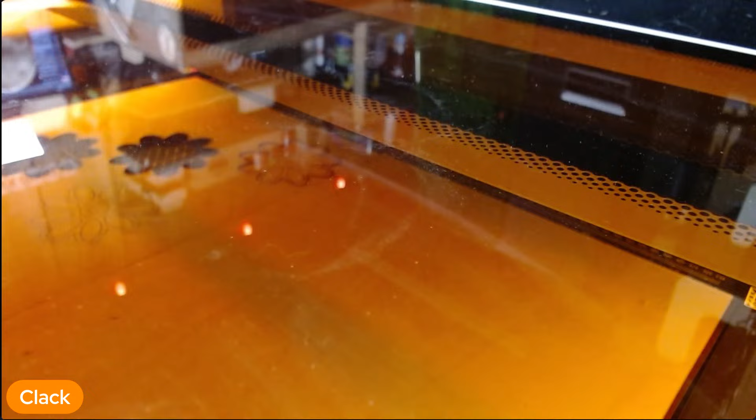All right, so it shows we got it connected, clean connection. I'm going to open, hang on, file, recent projects, ornament. This is the one I saved before I closed a while ago, so this is the same file. Frame. All right, that works.

Now, what was it we did next? Okay, we did focus next. So I'm going to macro focus. It actually went over a while ago and then set the pin and just got stalled out at setting the pin. So, okay, that's further than it made it earlier.

So yeah, apparently that door sensor is causing a problem, but it's not reporting a problem because it seems to be working like it's supposed to now. Yeah, so that's what it's going to be, guys. This is that door sensor. It didn't give us an error message, but I guarantee that I'm going to hit start and see what happens. Yeah, it's going to be that door sensor.

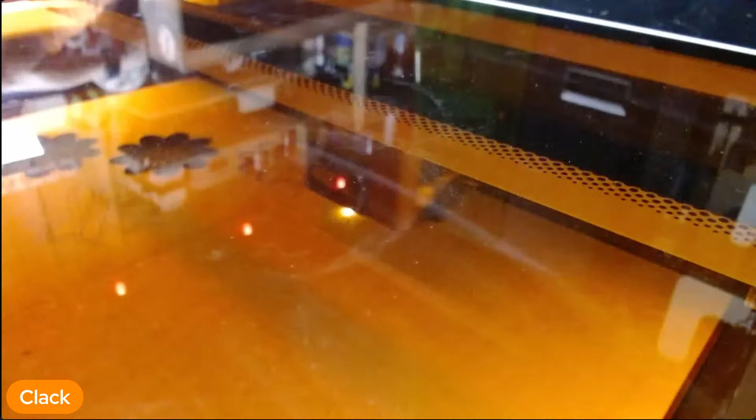Huh, so if you get this machine, make sure the door's shut all the way. Now you can raise the door up after you start it, and it's uneventful, like it does. It's not going to cause a big problem because right now it's engraving away and I can raise the lid. Now it's a little slow, but it does pause, and then when you lower the lid back, and I didn't even really raise it up that much, but we have learned that if the door is ajar when you hit the focusing operation, it's just going to stall out and you're going to have to start everything over. So make sure the door is shut when you hit focus.

Whew. Yeah, it seems to be working just fine there. I wonder if I can put the camera back. Let me test something, let me raise the door. This will let me know. Raise the door. The camera inside.

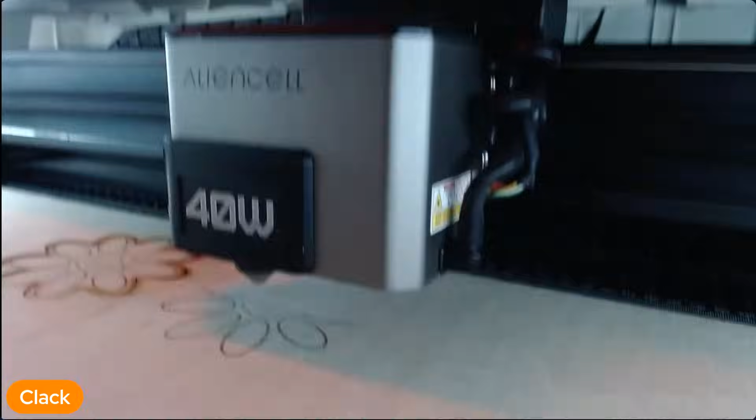The door is shut, but the camera cable is under the door. It's still paused. So yeah, that's what the deal is. There's a limit switch or magnet or something.

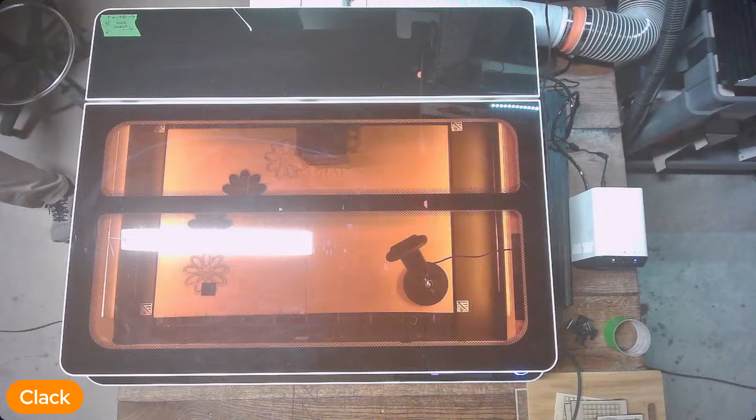I moved the cable around to the front corner of the door. So apparently the limit switch is in the back of that door. So I moved the cable toward the front and I heard it beep, the machine physically made a beep when I closed the lid after I moved that cable. And so now you should be able to see it, see where that cable's going in right there? Right here, watch it, put it back here.

That's what it was, guys. That's what it was. Well, we've learned something.

Like Saber says, I guess buying a flat USB cable. This isn't a big cable, it's literally just your standard little USB, like one of these. It's on a webcam, so it's a little bigger than this little guy, but it's just a standard sized one.

What's it doing over there now? It's cutting. Yeah, and that's with no air assist, because Lightburn, like I said, is not automatically firing the air assist currently.

I can turn it on manually. Let me go do that. By touching the little buttons on the top, I turned it on manually, and you can see the difference in the cut now with the air assist on.

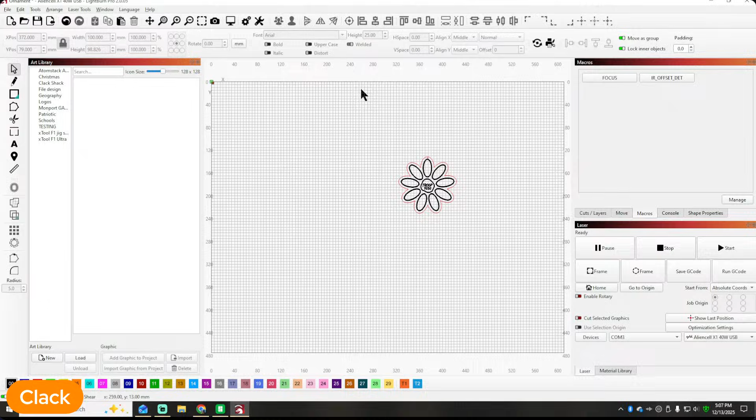Now that we've figured out the issue, I'm going to replicate this. I'm going to bring it down here, put it there. I'm going to delete that one. Now let's do this again. Let me move that camera back some.

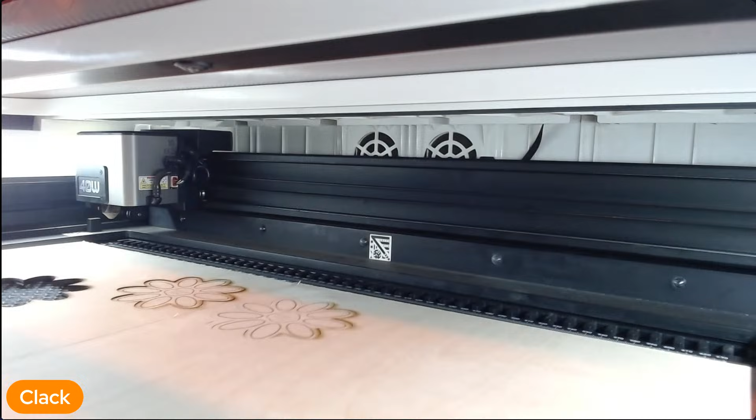Okay, there's a tiny little beep that can be heard when you close the door. If you do not hear that when you close the door, the sensor is not engaged. All right, so that camera's a little high.

Yeah, I think that'll work. Well, hang on, let me change where I put this one. Let me put this one beside that one, that way we can see the camera a little better. There we go. All right, so we're going to do the same thing.

We're going through the same steps, but this time I know that the door sensor is not causing a problem. So first thing we're going to do is frame. So here goes the frame. All right, frame worked fine.

I know that we've already set the focus, but just to run through the same steps, I'm going to hit focus again. It's going to go over, it's going to set the pin, do a little touch off over there on that little, whatever you want to call it. I guess that's kind of like your go by over there. Okay.

Okay, maybe it's not the cable. I'm going to frame again because it hung up for a moment there. Okay, it must have reset itself. All right.

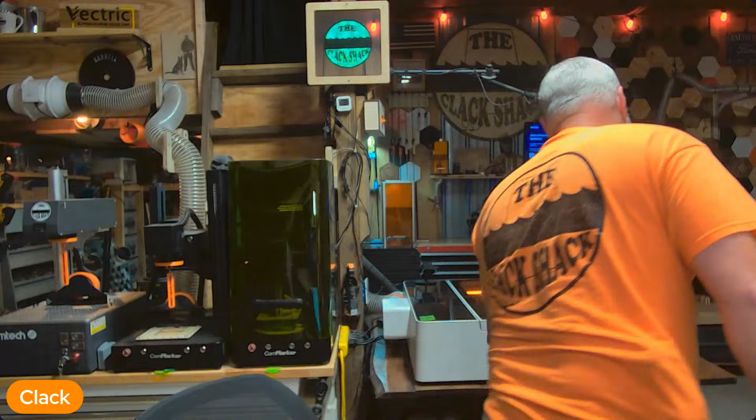All right, that's enough chasing gremlins for tonight, guys. No, it wasn't that, because it makes a beeping noise when you open and close the door. I don't know if y'all can hear it, but it's got a little beep.

So it beeps when you open the door, it beeps when you close the door. It beeped, the door was closed up. Dang, chair about to roll away from me. The door was closed all the way. That wasn't the problem, there's just still some work to be doing.

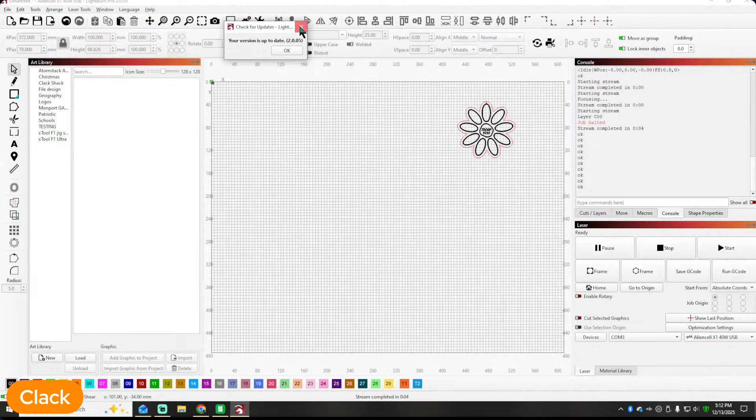Make sure I'm up to date on my... yeah, okay. And just so you guys know, I'm running version 2.0.05, which is the most recent version of Lightburn. So yeah, there's still some work to be done, but all in all, I still, like I said, even running their software, I kind of like their software better for this machine.

But the reason is because you get all the benefits of the technology, and I like the remote features. Case in point.

There's my 3D printer, and there's a Bigfoot that I've got ordered that I printed while we've been doing this. I like being able to peek in at machines, which my 3D printer is inside the house. And so that's how I monitor it out here and keep check on it. And so I like the fact that this machine has that capability too.

Just like with everybody panicking about Bambu Lab and all that, I like the creature comforts, you know what I mean? Maybe it does come with some risks or whatever, but I like the bells and whistles a lot of times. Sometimes software, like if the machine software is too limiting, too restrictive, then yes, I don't like that.

But as long as I can import from Lightburn files pretty fluid, like we did earlier, I'm good with it. As long as when I bring that SVG in there, it automatically puts it on different colors for me, like red and black, and it's already layered out to where I just click the layer and assign the settings, I'm okay with that.

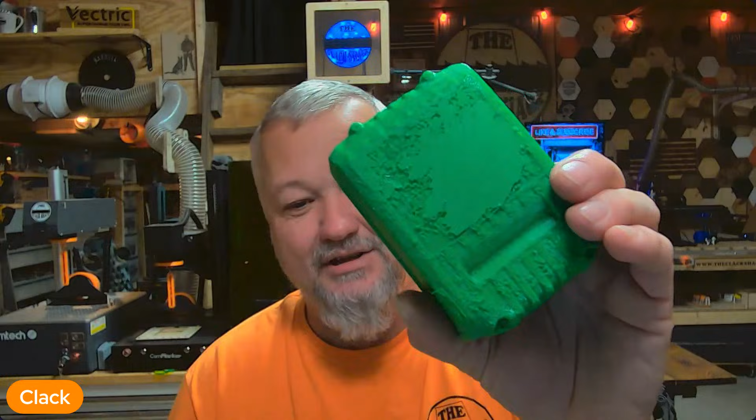It's wild. This is a 3D scanner. This bottom's kind of crusty, I should have made a bigger raft for it. That's my bad. The text on the bottom somehow caused some weird stuff. But yeah, that worked out pretty well.

And let me show you this one. Biscuit's a little mad at me. Biscuit found this old bone somewhere in the cow pasture, and I got a friend of mine that does taxidermy, so I took Biscuit's old bone and scanned it. That's what I wound up doing. And if you look, it did a really good job with the detail. Hang on, we'll get that right.

I mean, it works. So what I'm wanting to try to do is a scan of somebody and put it inside one of these crystals that we've been engraving. So we'll see how it works. But yeah.

Greg says, are the sites safe to use? There are some, let's see, what's the... if you hadn't asked me, I could have told you. There are a couple of sites that are pretty popular that we've used before to do grayscale layered images. I forget the name of the site now, I'm having a moment. But there are some out there that I have used. Oh, Imag-R. Imag-R actually has a site that will do the 3D relief stuff. Supposedly, I've played around with it, but I haven't had a lot of luck with it.